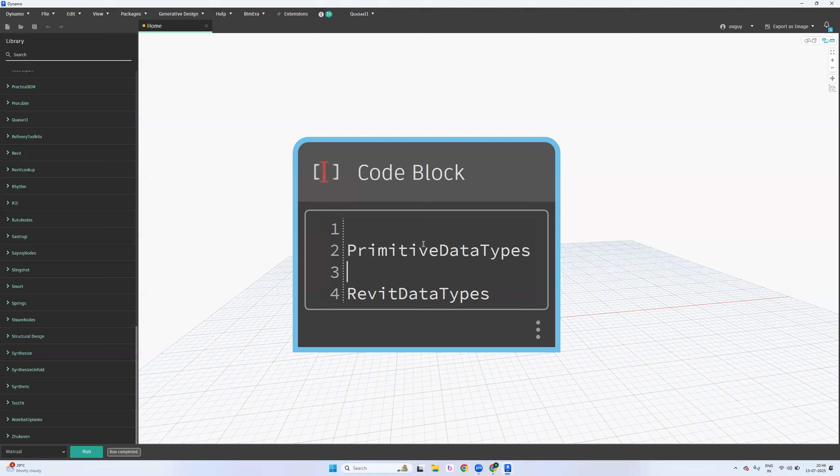So what did we learn yesterday? Come on, let's get into parameter types. Data types - how many types of data types do we have? Two types: primitive data types, and then application data types, Revit application data types. Very good. So can you list out what are the primitive types?

Integer, double, string, boolean, number, and integer controlled parameter. The parameters which we cannot change are built-in parameters. Null. Revit.elements.level - that we're going to see today. A string - we're going to learn that today too. We have a string here, we have a double here.

Give me an example for integer: 1, 2, 3 - whole numbers. Double: 1, 2, 3.4, decimal points, 3.456. String: it's a text. Boolean: true or false, yes or no, check or uncheck.

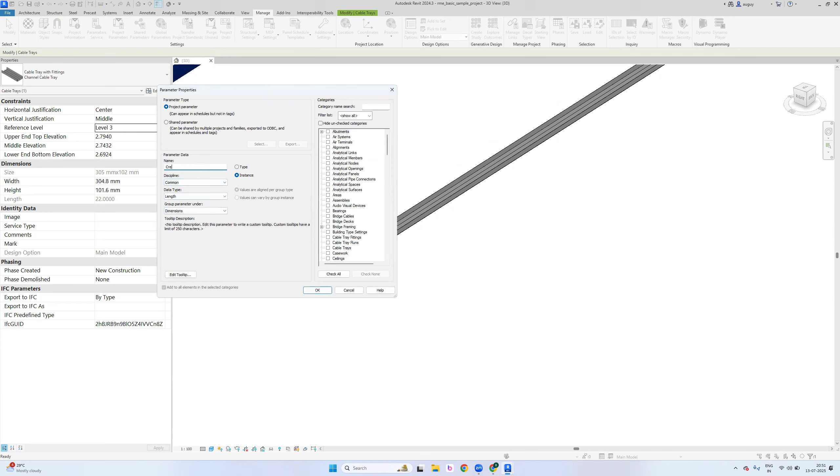If you create any parameter, it will show as a project parameter under identity data. Let's create one and I'll show you project parameters. CreatedByBIMEra, so it could be anything like a text or something under identity data, check all, and it's an instance project parameter.

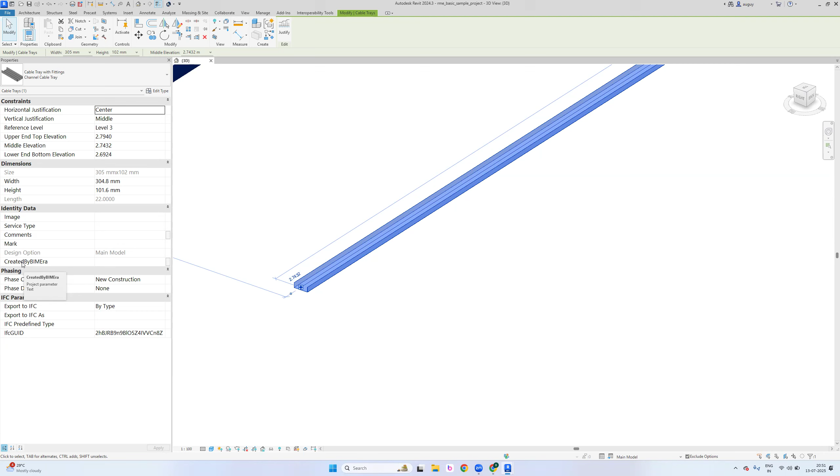Now if I click any element, I can see it's 'CreatedByBIMEra'. What is it showing there? Project parameter name, which is actually in bold color - CreatedByBIMEra, and it is a project parameter. What is the data type of it? It's a text parameter, simple. Clear now? Text. Do you need Dynamo to check the data type of it? No, no need.

So horizontal justification - now, built-in parameter, and it is saying it's a drop-down list. Now sharpen your brain here, because we generally have issues with the drop-down nodes only, I mean drop-down parameters. If it's saying it's like a drop-down parameter, you have to open a Y junction in your brain: is it either an integer-controlled parameter, or else it is an element ID, Revit-specific parameter.

Clear now? Either it is integer controlled or else it is Revit specific. So you have two ways now. For string, it's clear - it is clearly showing it is like a text. Let me hover the cursor on the mark. What is it saying? Mark, built-in parameter, and it is a text data type.

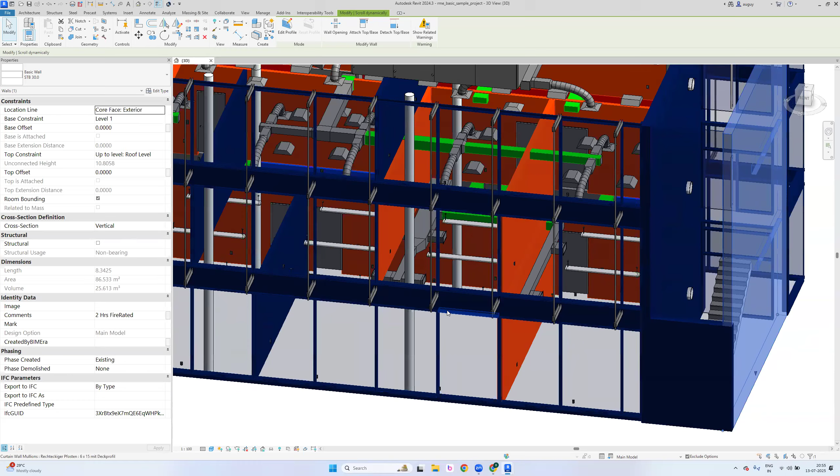Why is the size a text? That's the question, actually. This is taking these two values and adding some units to it, simple. There are some sort of parameters that are just for representation purpose - they just show you something, so you can't use it in the projects. For example, if you want this parameter in any schedules, you will get it only for scheduling purpose. For example, if I pick any electrical...

I'll show you something. If I pick any element, see, none of the parameters can I play with. When I hover the cursor, it can be a text or something else, but these are actually calculating internally. Is it clear? So you can't change anything.

If you assign some load to this, these values keep on changing, right? So if I check any other panel, see, total connected load. If I disconnect some lights or circuits, it will calculate internally and the values will update automatically. You can't edit those. Is it clear? These are called read-only parameters.

What kind of data type is this host? Tell me. Is it integer, double, or string? It is a string. Why? Because it's text - it has double quotations in it, special characters, right?

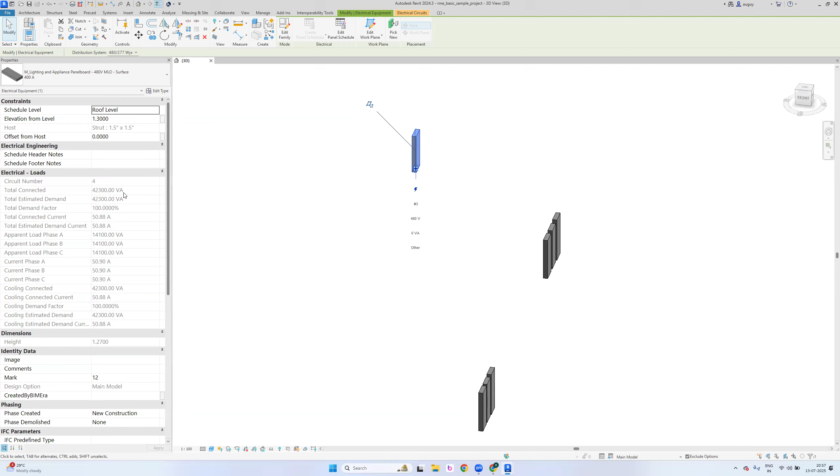And what about 42300.00? This is a double, I think. But why? There is a VA also, right - there is text in it too. It is a text parameter... no, actually double units are not there, I think it is actually units. They are units, they are actually units.

So units cannot be considered as a special character - special character, ASCII character, or a string. Is it clear? Simply, volt amperes is a unit. So units will not be considered.

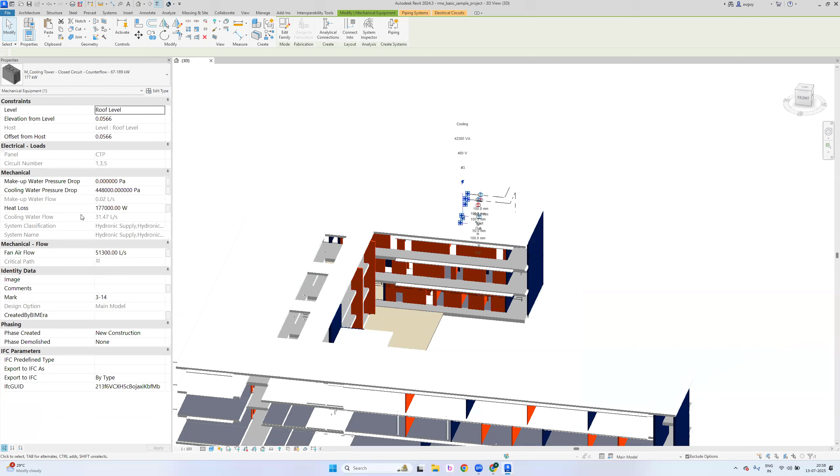Like for example, let's go with all. So what is this cooling water flow? 31.47 liters per second, correct? So liters per second is a unit again. When you hover the cursor on this, it is saying it's a flow. Flow generally is a double number. Is it clear?

What about PA? PA is a unit - it passes because you can't delete that. 1, 2, 3, 4 - if I change this, the PA will be added automatically. But in the size, we mentioned mm, 305mm into - where is that? Previously you mentioned the size, but that was auto-generated. See, that is what I'm saying - a few of the parameters, most of the parameters will try to confuse you.

So we have to apply some common sense over there. If any units are coming automatically, which will be null or negligible, it will be considered as a double. And if you are adding anything manually, it will be considered as a string. Clear? Okay, good.

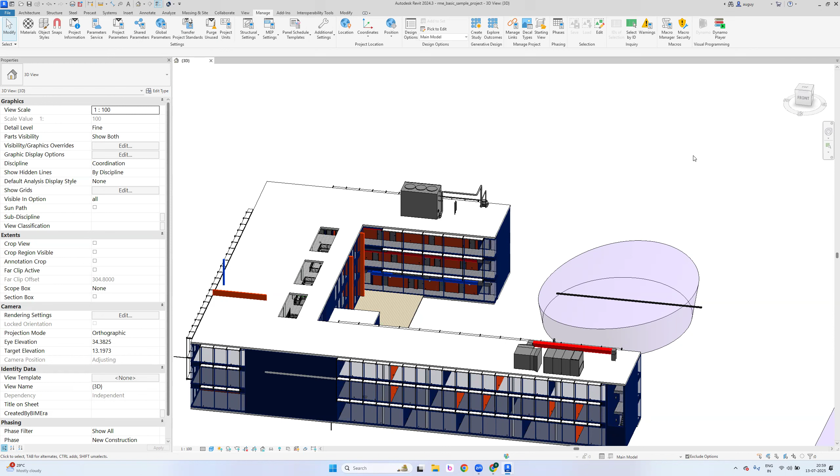So, how about phase created? This is a dropdown now. Again, is that integer controlled? Hover the cursor on this - what is it saying? Dropdown list. So whenever it says dropdown list, you have to think in two ways - either it is an integer controlled parameter, or else it is Revit specific.

So today we are going to play with that Revit specific - how exactly you have to pick that particular element. I'll show you today. So what is the data type of this crop view parameter? It's boolean - yes or no.

Region visible - boolean. Annotation crop - boolean. Clip active, section box, sun path - all of them are boolean.

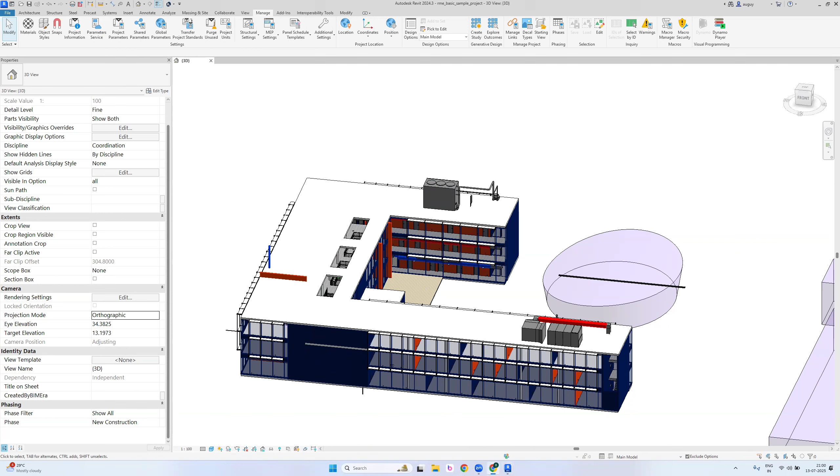What about this visible in option? Dropdown - built-in parameter, dropdown list. Okay. Projection mode? Yes, it's also dropdown list. So if it is showing like a dropdown list, guys, you have an assessment. Today let me show you what kind of an assessment is that.

Sorry, assignment. Okay. So download this PDF, and don't play with any other disciplines apart from yours. Like Rajesh showed me only the cable tray, so I have to pick the cable tray and keep on playing - no, not like that. If you're from a particular background, like electrical or mechanical background, play with those elements only. Is it clear? Play with those elements itself.

So how do you exactly write element category? Take a printout and write element category. Okay, I picked duct here. So what is the variable name? It means parameter name - what it is exactly looks like, how it is exactly looks alike, and what is that actual duct type? It's your answer, and cross check if your answer is right or wrong. Is it clear? So there is another way when it comes to Dynamo.

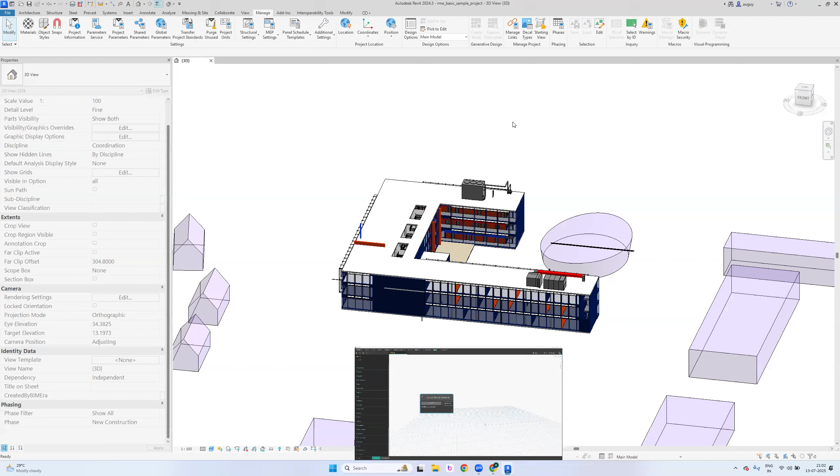I'm going to send this, the data types, and tomorrow I'll send you another one. Today itself I'll send you the second one as well. Okay, clear? Good. So, select model element, select model element, select model element. I just select, and if I pick any element here, let me mute everyone.

I've already picked here: element dot parameters. I'll explain how you get this so much faster.

It's purely technique, bro. I don't have a good memory, seriously. If you ask me frankly, Rajesh, how many nodes do you generally remember? If I go for an interview and the interviewer asks me how many nodes I remember, can I list them out? I can't even say maximum 10 to 15, seriously. But it depends upon that particular scenario.

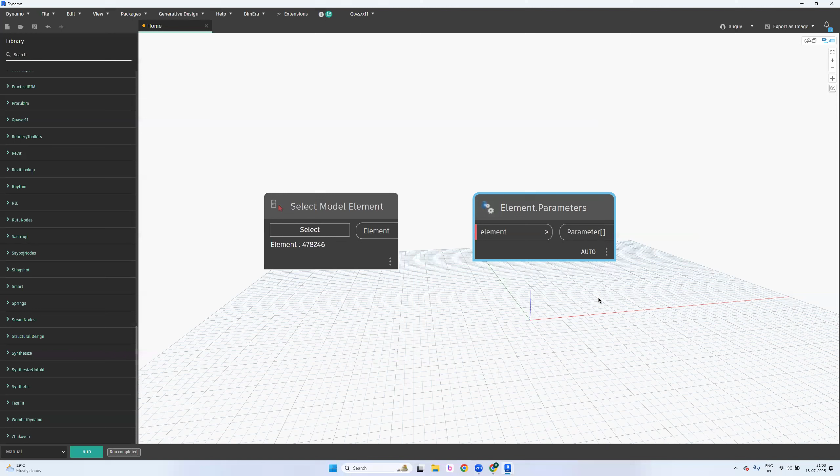There are 6 strategies to play with, and I'm applying those strategies all the time. I don't remember all these node names, seriously. Even to place this fast, we have a technique. I'll explain that strategy in the training after some time.

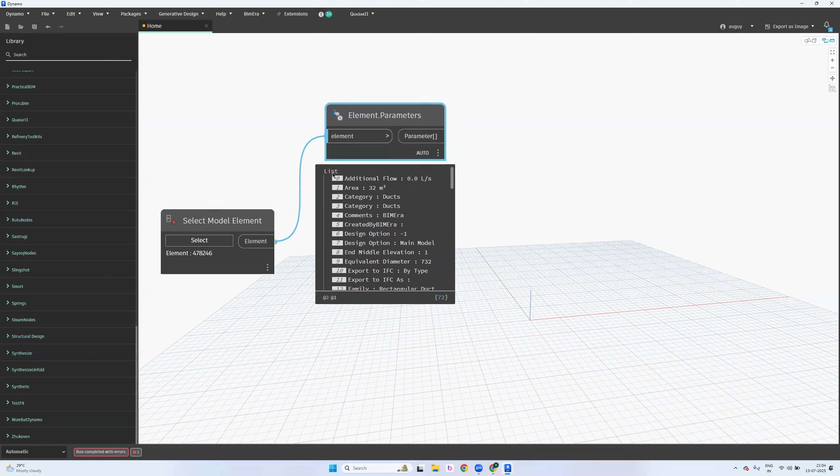So it's automated. It's giving me all the parameters of the particular object. Guys, clear? Guys, are you clear? Yes. Okay, so now these parameters are either edited or read only, it will give all.

We have read only and write only parameters also, both. Some of them can be read only, some can be write only. I'm going to show you that.

So what it is actually asking for: I have an element, can you please get me the parameters? Okay, I can get this. I have a parameter, so you have to frame a sentence. In coding, you have clear functions. Even asking for those functions is interesting, but people feel it's very tough to play with. If you ask me, do you have any solution? Yes, I have a solution for that.

Anyways, I'm going to teach you. Guys, I have designed this course based on 3 different languages. Understand, I have experience, and I didn't do this unintentionally. Some of our experts suggested to me, Rajesh, this kind of example you'll get. If you want to become a tutor, go and learn that particular language so that you can explain any concept which everyone can easily understand. So I have learned almost 3 different languages - Python, C, and C Sharp. There are 3 different languages. And I'm a certified tutor, I mean how to go and teach at their levels, with their standards.

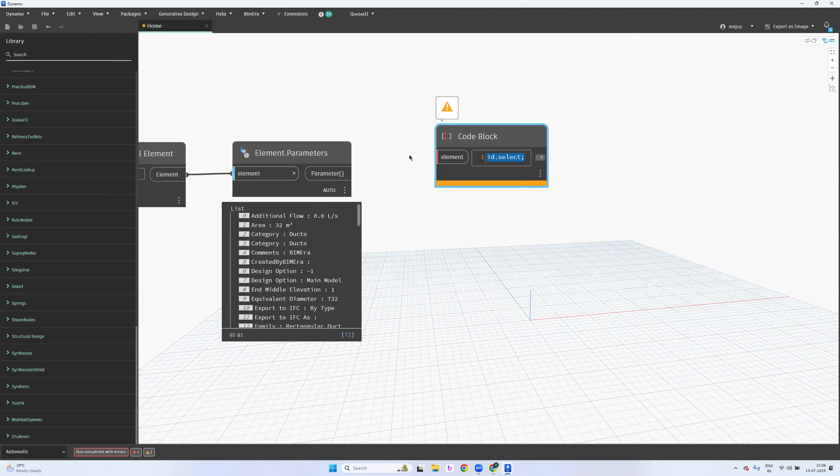Is it clear? I have an ID, I want you to convert into the string. I have an ID, I want you to select that element. Guys, are you clear? Have you seen the difference between before the dot and after the dot? Did you see the difference? Yes, a yes.

We are going to do a deep research in our training later. This is called the parent and child concept, which is a 30% part of the dot notation concept. I'll show you what the dot notation is in some time.

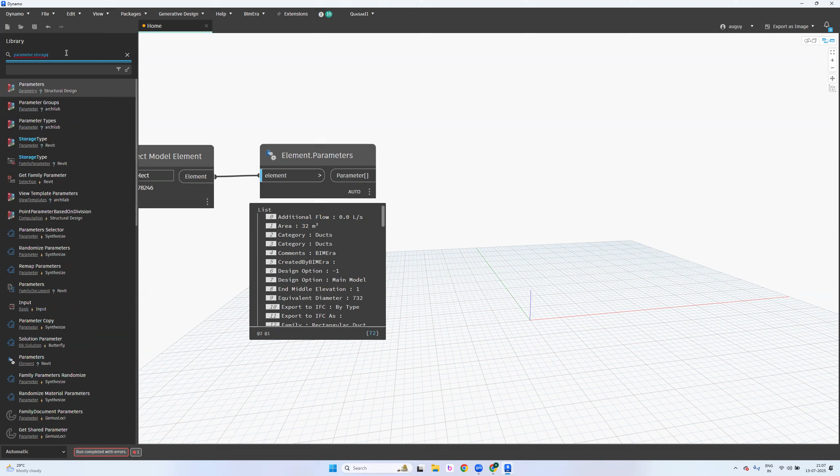Otherwise, I can show you now also. Hold on, so I have a parameter, can I know the storage type of it? Yeah, why not. Parameter - don't use, I'm actually right clicking on the canvas. This is called canvas actually, our workspace. And this is the library. So parameter dot...

So what I'm having now and what I want to play with, what I want exactly - okay, parameter dot parameter types. What is this parameter dot parameter types?

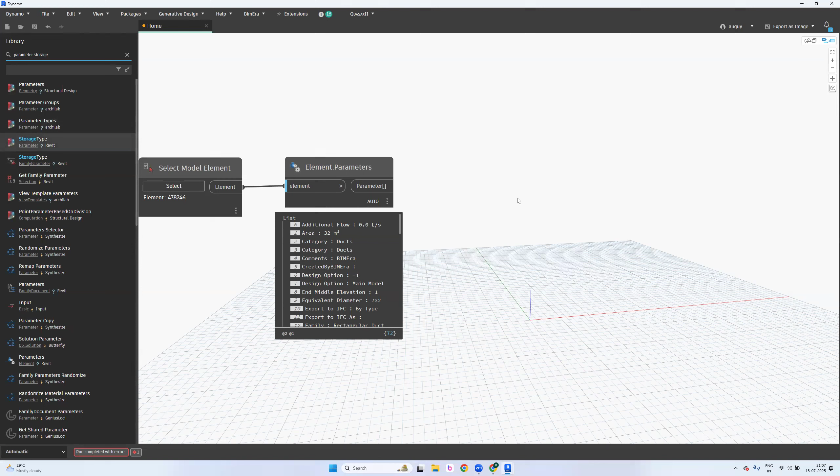Why am I not able to place that? Okay, ignore that, I don't know why it did it. I have a parameter and parameter both matching, so when I connect that, it is directly showing me what type it is.

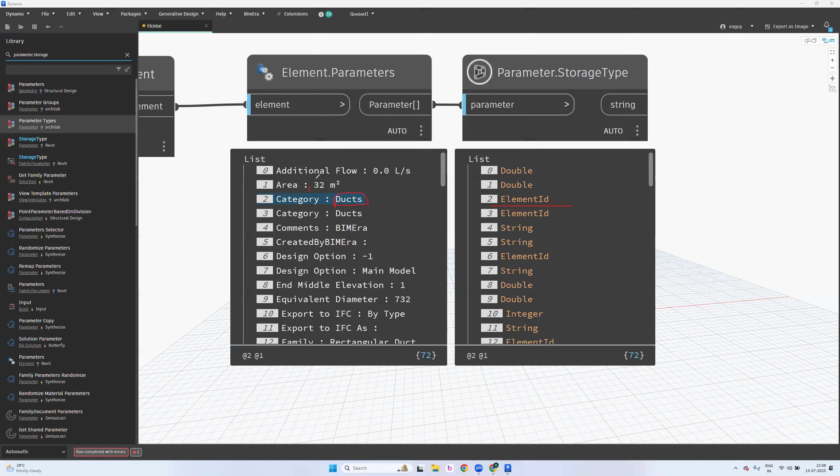Guys, are you clear? Okay, yes. So there will be no confusion if you have a parameter, you don't want to get into Revit again and check what kind of data type it is. Let me give a clear introduction about the data types, the primitive data types, where you have confusion. So category, what it exactly looks like...

Ducts, it looks like a string, but it is an element ID. 32 is not exactly, it looks like an integer, but actually the storage type is double. So 0.0 liter per second, that is double.

Okay, third one is fine. Fourth one is comments, I know comments is a string type parameter created by the one we created today. It's a string, and design option is -1. What does this -1 represent?

We're going to learn this in design scripting, till then don't ask me. It is not an integer, it's something else. Sixth one, here it looks like an integer, but it is actually element ID. That's what I'll explain later - design option, main model, design option.

Here it's showing it's like a string. End middle elevation, double. Equivalent diameter 732, it's double.

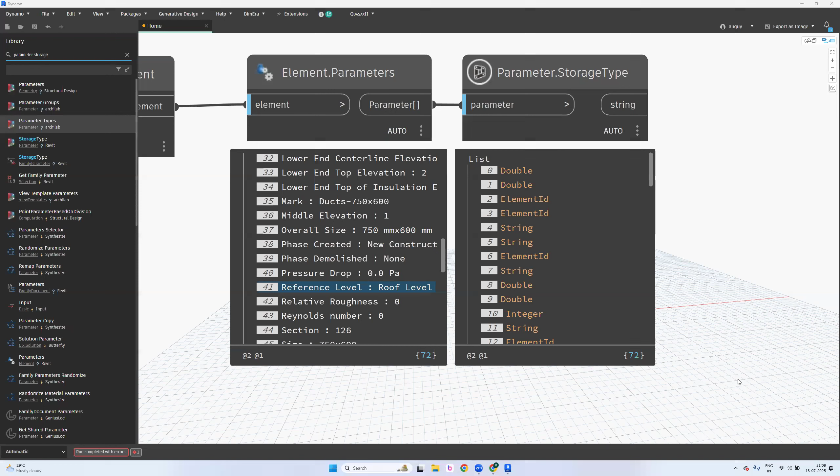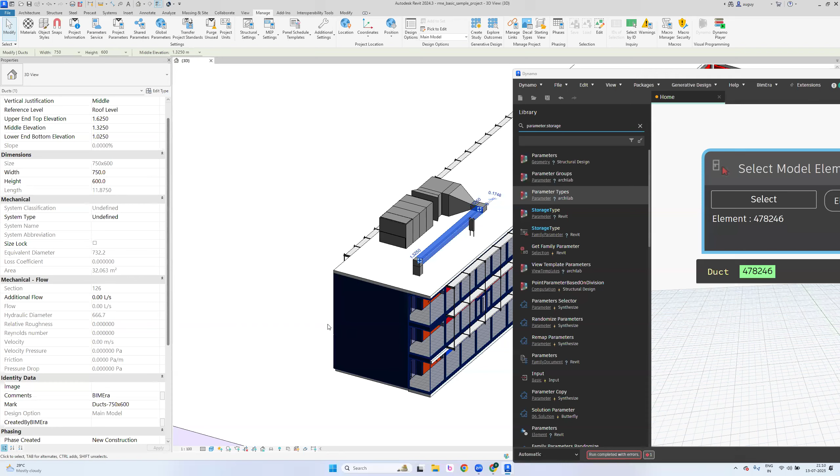Okay, if I scroll down, what is this element? Is this a cable tray? Duct - which duct is this?

Okay, I'll just pick that out. Now horizontal justification - if I zoom in, these are actually in alphabetical order. So HIJK, horizontal justification, it is actually center.

But at 19th index number, it is an integer. What do you mean by that? It is an integer control. It looks like text - am I right? It looks like text, but actually it shows it's an integer. It means it is an...

Integer control, what is that? Integer control, integer control. It's a drop down integer control.

Vertical justification - let me show you vertical justification again, and again that's set to the middle, and 70 number - 70 again is an integer.

What about system type? System type undefined, 59 - it is an element ID. So system type, since it is like a drop down, it is an element ID.

Do you have phase created? PQRS, phase created 38, element ID, phase created. When I hover the cursor, yeah, drop down list - so you cannot control this with an integer.

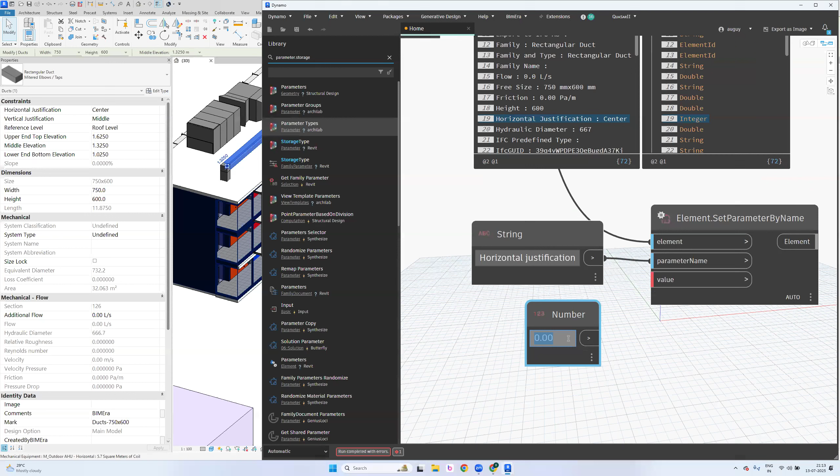Once it is created, we cannot. So you want fancy numbers, huh? You want fancy numbers for the elements? No, no, actually I just want to understand more about this element ID - what is element ID actually? Is that possible?

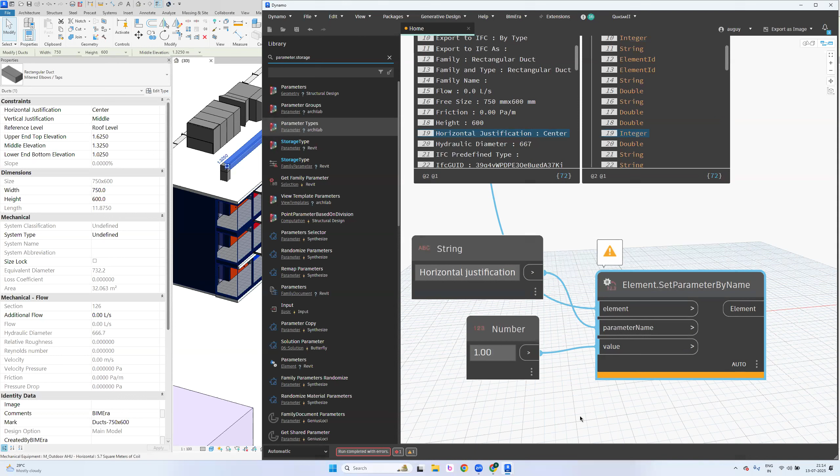Okay, fine. So number, I'll just change this value to 1 and connect this to this. It's giving me a warning actually - what is that? Can you guys give a wild guess?

When I hold the cursor on this, it says no parameter found with that name. Why? Because it's case sensitive. Even if you add a space or forget a space, it will not accept that. See, it works now—it's set to left.

Is it clear? So based on the parameter storage type, you have to decide what node has to be placed and connected to the value. Guys, are you clear now?

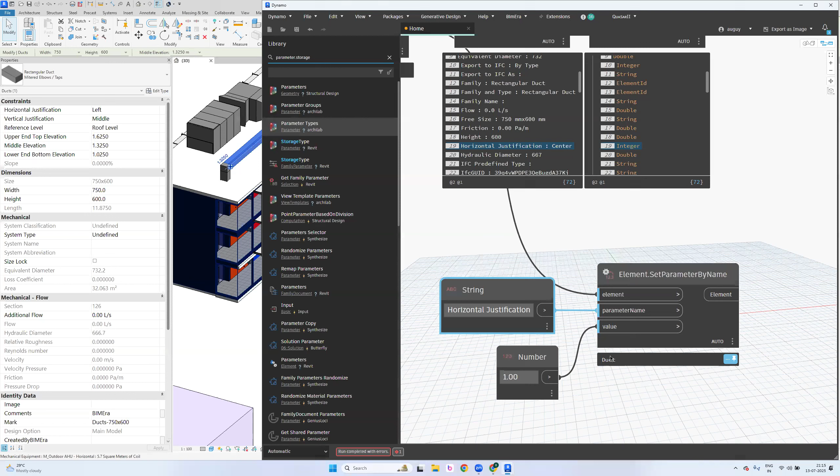Is everyone clear? Shall we get into the Revit data types? This is very, very important. Make sure if you have any questions, clear them today itself. Don't postpone it for the next day sessions. Okay, let the session extend if needed, no problem.

So this assignment which we are going to get, we have to take the help of element parameters and parameter storage type to fill that. You have to do this in the early days, especially if you're very new to Dynamo.

So what is the storage type of a mark parameter? String. Do you need to remember that a second time? No need. Okay, if you keep on playing with these parameters, you don't need to use this parameter dot storage type at any cost. In case you've tried all the ways and it still didn't work, then you will apply this strategy.

Clear? Clear, bro? Clear. Yes, okay, yes, great.

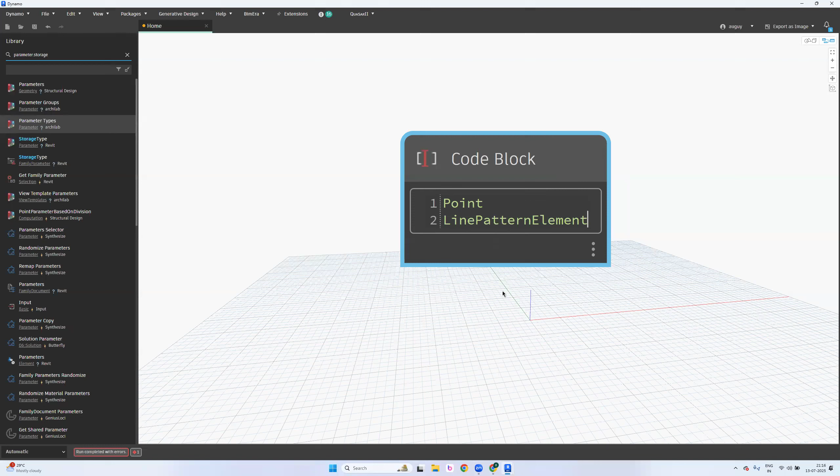So what are the Revit specific data types we have here? First of all, a point can be a Revit specific data type. A line is a Revit specific data type. A surface is a Revit specific data type. A solid is a Revit specific data type. An element is a Revit specific data type.

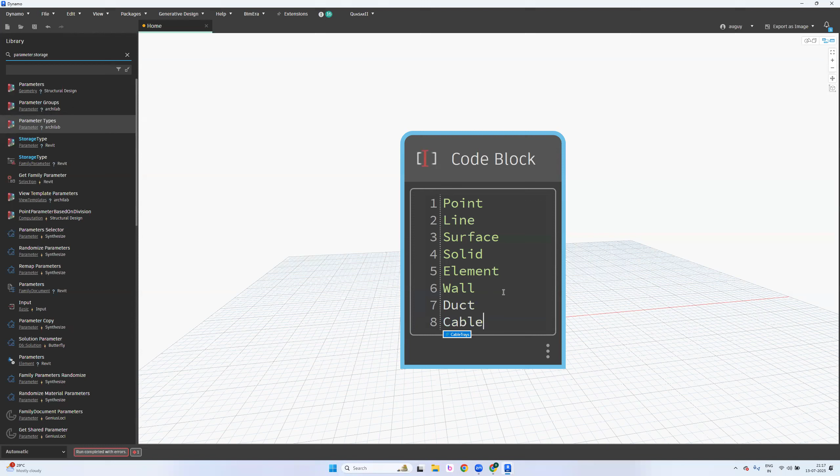For example, wall, duct, cable tray, pipe—let me mute everyone—okay, pipes. So what not? Any object, if it's not a primitive data type, we can consider that as a Revit specific data type. Is it clear?

Yes. We have two types here. First is like element, and second one is geometry. These two are the Revit specific data types. If it is not an element and if it is not a geometry, it will be a primitive data type. Is it clear?

So will point come under element or geometry? Geometry. Very good. Line? Geometry. Surface? Geometry. Solid? Geometry. Mesh? Geometry. Okay, and wall? Element. Duct? Element. Cable tray, pipes, and all—these are elements.

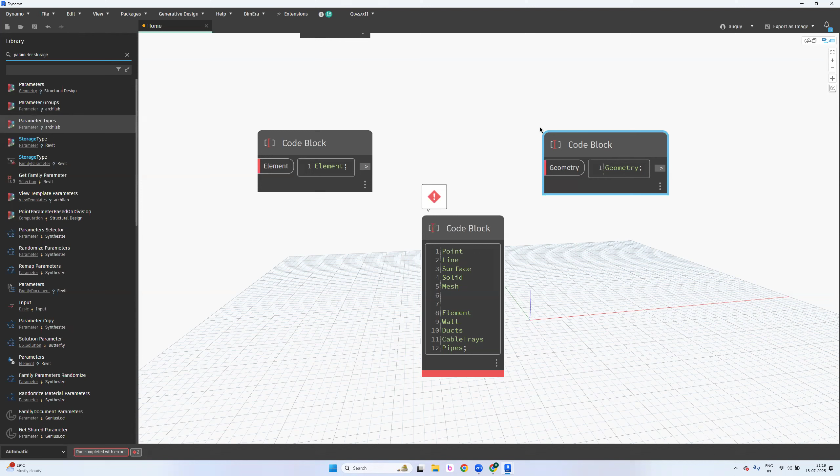Yes, so sometimes what we do—if I want to play with Dynamo, if I have something in the geometry format, I have to convert that into the element. If I have something in the element format, I have to convert that into the geometry format. These are called geometrical conversions: element to geometry conversion, and geometry to element conversion. If I have lines and want to convert them into walls, trays, or ducts, what do we call that? Geometry to element conversion. Is it clear?

For example, what about this geometry to element conversion—that's what I'm doing here. I have a number of lines. I just want to convert these lines into ducts. Lines are geometry, and these lines have to be converted into elements. Okay, now I have elements.

So this is a tray, and this is another cable tray, and another, and another, and another. So I want to place the supports—I want to place a support every 4.5 meters: 4.5, 4.5, 4.5, 4.5, 4.5, 4.5, and 4.5 meters. Guys, are you clear?

So how do we place the points here? We are doing some sort of element to geometry conversion. You are taking the element as a reference and creating geometries, creating geometrical points. Then you are going to use those points—you want to convert that point into an element again. What is that element? Supports. Are you clear, guys?

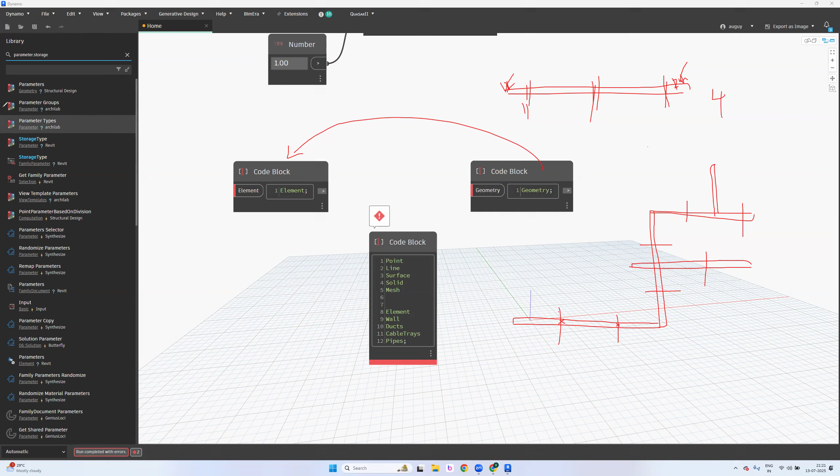So how do you place that? Using some sort of geometrical formulas, you can create such placements. And you have the CAD, you have an element directly, so element to line, and I'm going to show you all these examples. They're not actually scripts, they are examples, I'm going to show you.

Guys, are you clear with element to geometry and geometry to element? Yes, clear. Good.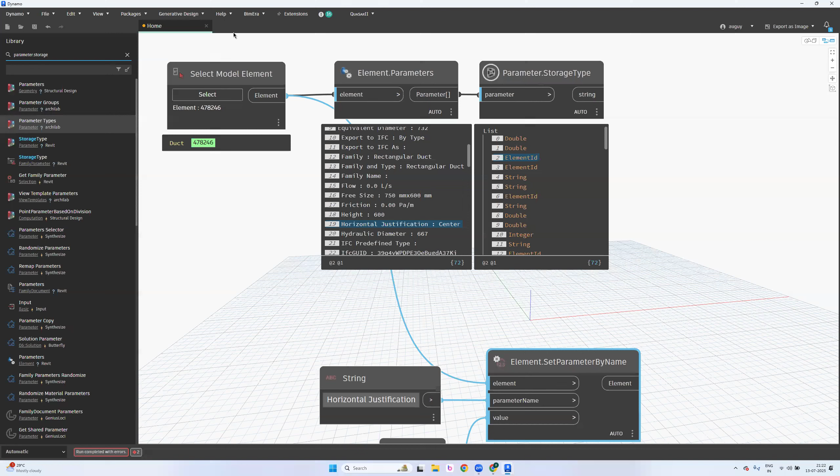Let me, it's a category, okay fine, we can't change this. And the sixth one is design option. So for design option, I have to create a new option set, option one, option two. Option one and option two, okay fine.

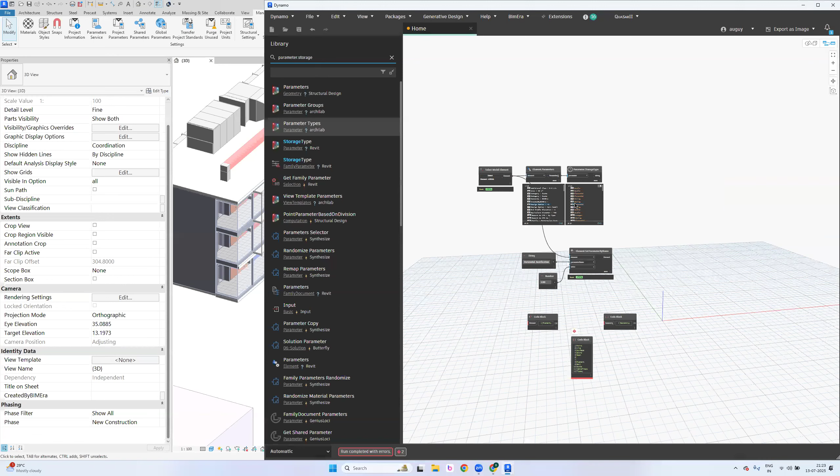Here, that's an element ID. How do I play with this? There are some different ways to play with it. Let me show you some live examples here before we go further.

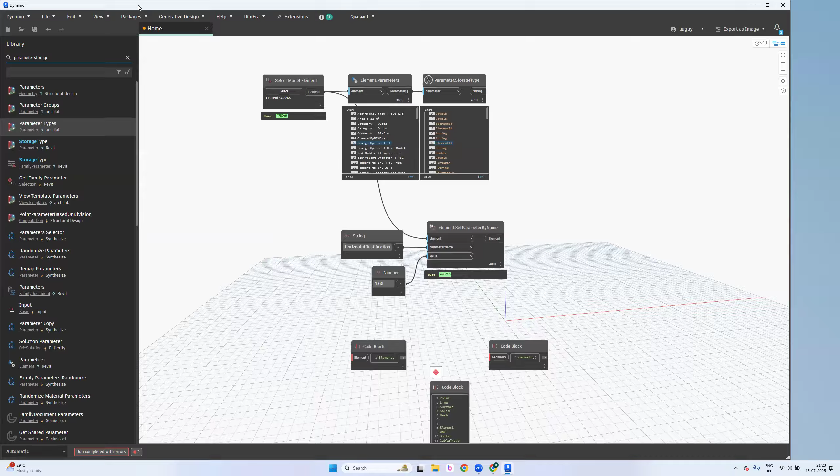Where is that Revit? It's here. I'll just send this. Better, this is much better. But guys, can you able to see the screen if I'm minimizing like this? Can you able to see the screen? Yeah, I can see. Okay, perfect.

So what I do is I just pick an element. I want to change this. I know this is an integer control, is this an integer control? No. Is that an integer control? No, right? Okay, when I hover the cursor on this, what it's actually saying is built-in parameter drop-down list and reference level. So if it's saying it's a reference level, how do you come to know that?

Very simple. Use get parameter value by name and connect this element to this, with parameter name reference level. What was that, string, and type that particular parameter name.

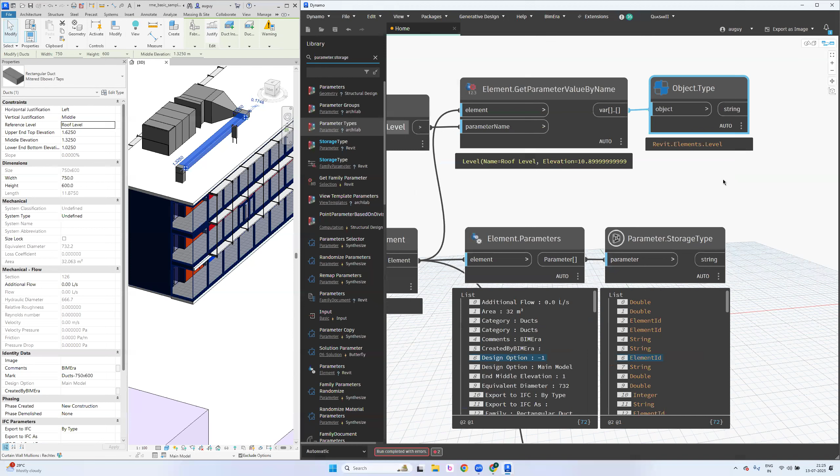That's the reason I'm using object.type. I'll explain once you have a good amount of experience, and if I feel you can digest some complicated concepts, I'll explain how without using object.type you can find out what it is exactly. So this is showing like Revit.Elements.Level. Level, level, level, so immediately find a level nodes.

Level, so you have a levels node. This is what it exactly means, drop-down list in the sense drop-down list. So have a level one directly. Guys, clear? Are you clear?

Now if I want to play with the reference level parameter, my integer won't work. Parameter storage type is not a number, I know that's not, and it is expecting levels. Okay, then that is a true level.

I just want to change this to level 3 and connect this to this. Guys, are you clear? What is the value there? It's level 3 now, it's changed. So when I change this to level 2, it's changing. When I change this to level 1, it's changing. But why is it still there? Elevations are still the same.

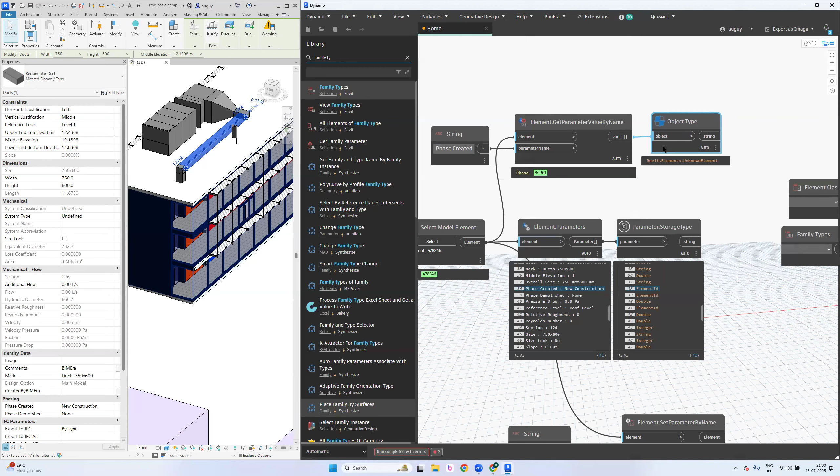38th parameter is phase created. Let me check. Here I have a confusion now, which is saying unknown element. Why, Rajesh, is it not showing it's a phase or something else, and why is it showing unknown element? If it's showing unknown element, you have to apply some common sense again.

So why am I always saying common sense, common sense? Developers use their brain very, very fast. They are very fast in thinking because they keep on playing with it. I mean, if I ask you why I'm not able to see that element in a floor plan, what do you say? Yesterday I placed 100 elements. I'm not able to see those elements now. What do you say? What could be the reason?

View range could be the reason, or it could be hidden - multiple reasons. Second one, or worksets. Visibility graphics settings, VG filters, temporary hide or isolate, temporary hide, work sets, view range, or it's in a plan region.

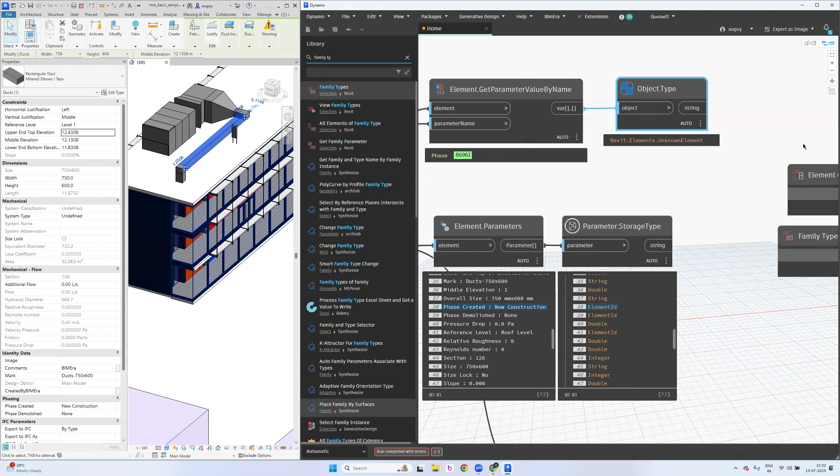Correct? See, for one problem we have multiple solutions. And since we have a good amount of experience in Revit, we can say that it could be something. But here it is not exactly like that. You don't have multiple options, you have to think - think unknown element.

If it's showing unknown element, can I read anywhere else? So phase - this one, phase. Okay, that is phase actually. I'll type phase. I found a select phase option. I found a dropdown node. If I want to play with this particular parameter, which parameter - phase created - the value will be select phase. Are you clear, guys?

So 39, what about 39? That is also element ID, that is also phase only. 41 - level, you mean this, correct? Yes, correct? See, very simple. Since you have seen level, maybe it is expecting a level dropdown.

And the 59th one - system type. System type. How do I play with the system type? Do I have any system type nodes? Do you have any system types?

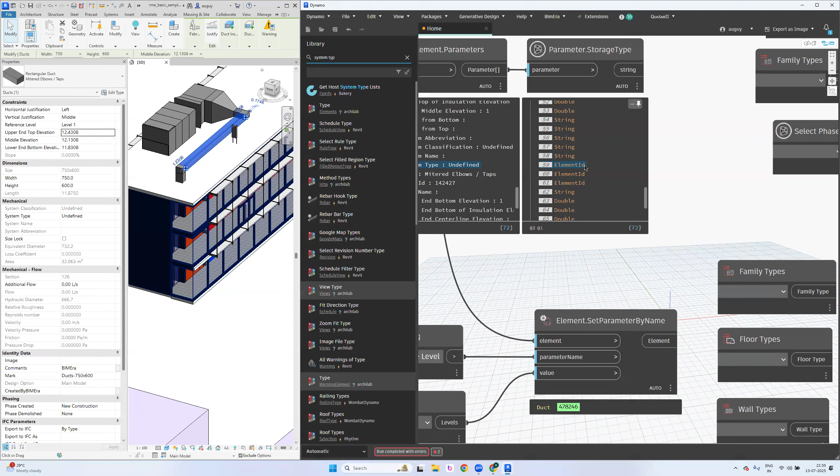String, you cannot pick manually. How? Very simple. If it's showing like a level, here it shows like a level. Then you have to right click, or type 'level', put a dot next to it, and type 'by name'. So, level by name. Are you clear, guys?

Can you give some other example, please? I'll give you an example. Level by name - what if family type? Family by name, so family by name. Family type by name. What is this 'by name'? Category by name. Category dot by name - I'm going to show you what this is.

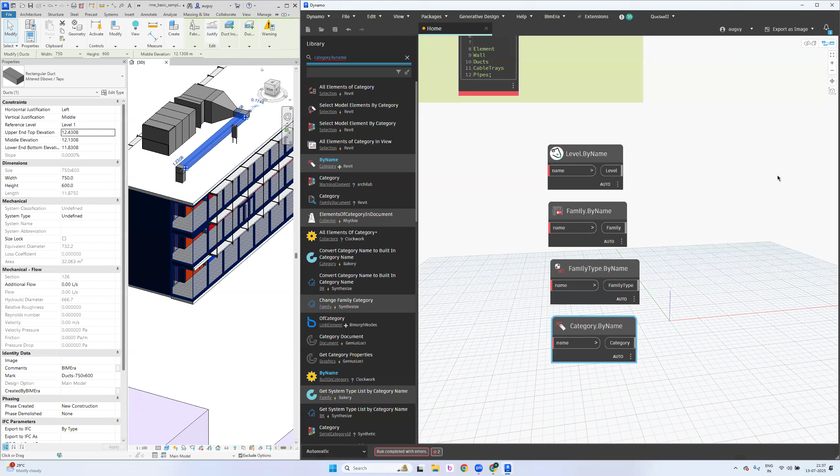There is another strategy again. I'll come to that. There are only three strategies. If the drop down element IDs are not simple, most of you get stuck here. If you want to play with any kind of parameter, you're already good at primitive data types. So getting hands-on with Revit data types is not that simple. In the training we have a lot of techniques, so don't worry, I'll show you everything.

So what else do we have? Family type dot category dot by name. For example, floor type, array type. If I don't have a floor type drop down, floor type dot by name, and wall type dot by name. See, category by name, element type dot by name, roof types - here it is. So this is the alternative for this.

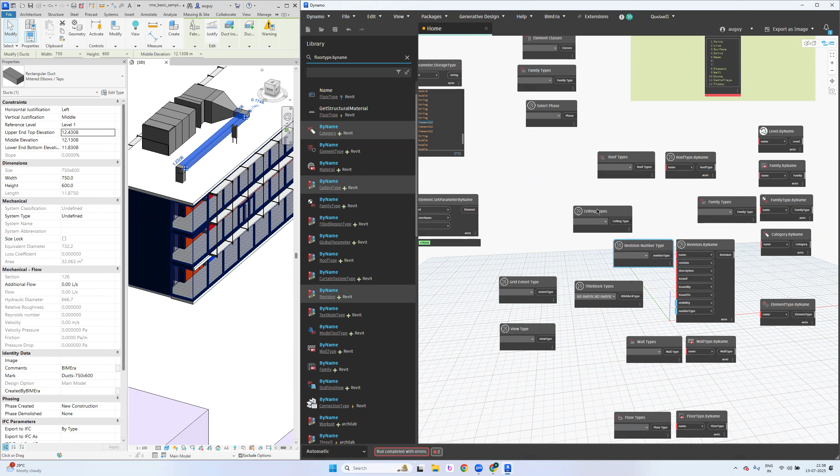This is the alternative for this. Element type, element family type - this is the alternative for this. This is the alternative for this. And wall type dot by name, wall type dot by name - so this is an alternative for this. Revision number - revision by name, this is the alternative of this. Ceiling type dot by name.

Guys, do you understand what this is? How to use it? In case if I don't have - I don't want to confuse you here - for example, I don't have a levels node, the drop down node. Are you clear? So I'll be using this. How do I?

I want you to type a level name in a string format. What is it asking for? String. Guys, clear? So type a string and type the particular level name. It is level 3 - if I want to set it to level 3, see that's converting to level 3. It's converting. What if I don't have a level 4? What if I'm asking for level 4? Will that create? No. It will say, I don't have a level 4, I don't have level 5.

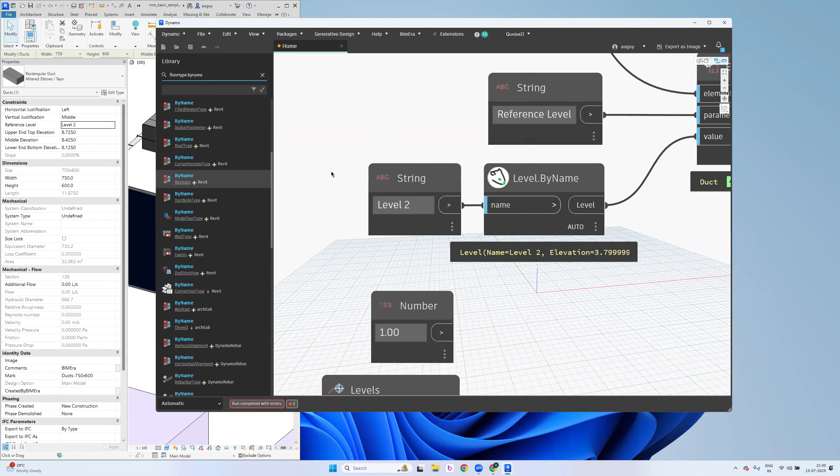So it means it's just giving you from the drop down, level 2. Instead of a drop down, we used to write this manually - this is actually a traditional method. But later on, the developers felt that people using Dynamo weren't able to access this properly. So instead of writing manually, they converted everything into a single drop down. Is it clear? So drop downs are for our convenience, but the traditional strategy is this. What if I connect this level 3 to this? See, it changed to level 3. What if I change to level 2? It changed to level 2. Are you clear now?

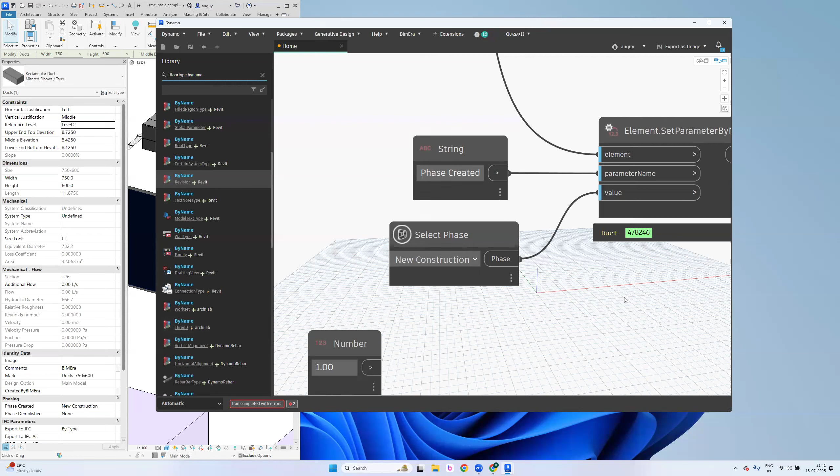What if I want to play with a phase or something - phase created, phase created, and I have a select phase. I just picked the existing one. Since it's already in the new construction, I changed it to existing - see, it's changing. If I change this to new construction, it's changing. Do you see that? What if I don't have the drop down? Phase dot by name - check phase dot by name if you have any such node. Phase by name.

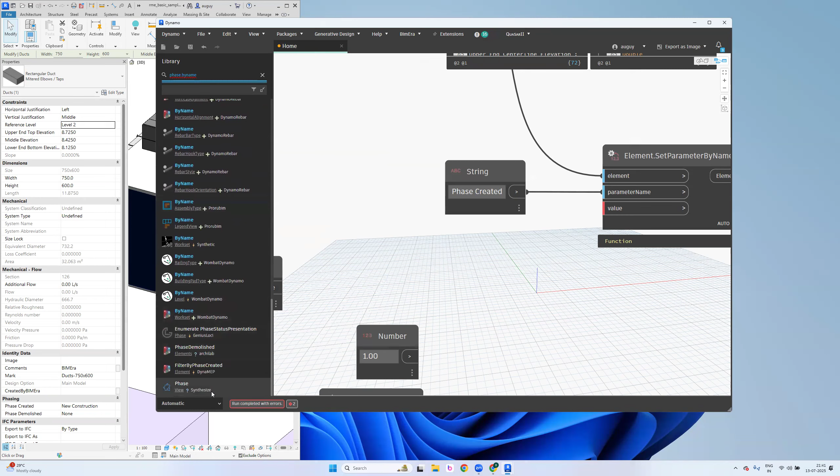Is that phase created by name? No, it's not phase created by name. Get phase filter, phase filter by name. What is this? This is a phase filter. So what if I type existing? No, this is not, this is phase filter actually. Phase. I'll use my extension.

If even the phase by name failed, I have another alternative. What about that get phase by name? Do not get phase by name. Get phase by name. Okay, so I have one more. What if I use a string?

New construction. New construction. So when I connect this to this, it's executing.

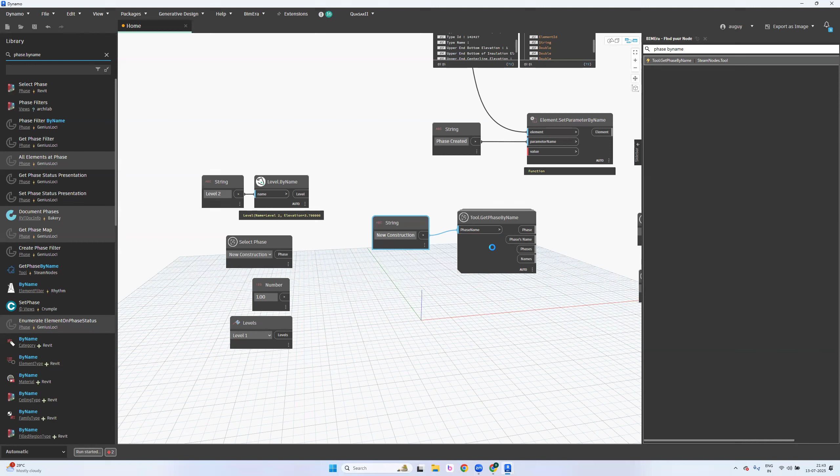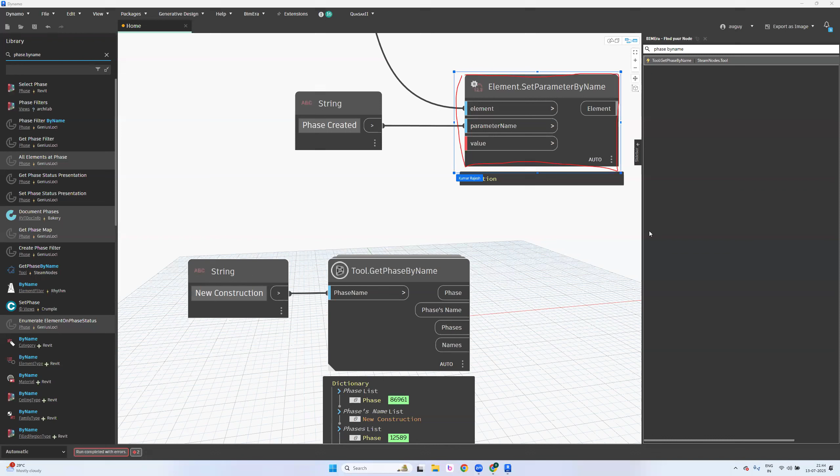And if you notice that when I'm playing with this custom node, the runtime which is loading is taking more time. Did you notice that? That's working, but it's taking a lot of time compared to this kind of node. Did you feel any difference between this and this? Visually, this has only one layer, yes, correct? This has only one layer, but here it has one, two, multiple layers, three layers on it.

Okay, so do you know what do we call this? Both are nodes, but what kind of custom nodes are they? Custom node, custom nodes, this is custom node. What about this? Default system? Not default, zero touch nodes. Okay, remember this is zero touch nodes.

Comparatively, when it comes to the runtime, custom nodes are 5 to 10x slower than zero touch nodes. Guys, are you clear? Yes. So zero touch nodes are much faster.

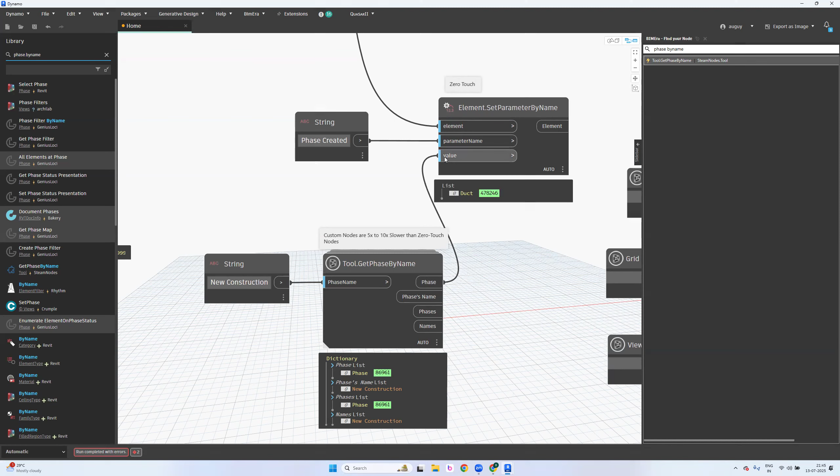Now, anyways, for me, if I couldn't find any zero touch node for phase by name, what I do exactly is I'm using the custom node stuff. I don't have an alternative now. Rajesh told me that slows down the mission, but if you don't have another solution, you have to go with what you have. Is it clear? Now, so I have to connect this phase to this.

Simple, it worked. It's set to the new construction. What if I change this to the existing?

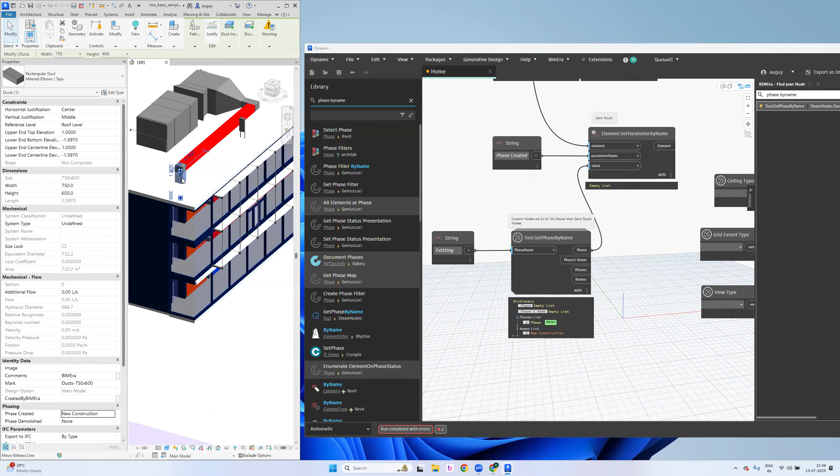Empty list. Refresh. Why it is showing empty list? Oh, there is no existing actually for this object. What about this? Okay, that phase got deleted, I believe. Okay, so that's the reason.

Now, if I connect this to this, it's working. Do you see that, guys? Yes. Okay, so this is very simple. And this is another option. If you don't have a drop down, then you have to follow this.

If you don't have the drop down, what if Rajesh, I don't have a drop down? I don't have a by-name node as well. If you find out, Control F, if you type byname, there are n number of nodes with the byname. Do you see this? These all are like sort of create nodes. I'll explain what those are.

I mean, what kind of nodes we have. We have create, action, query, and you can see on top of it, it's showing like a zap icon, plus icon, question mark. What are all these? So while you place any node on the canvas, make sure you know what type of node you're exactly playing with. Otherwise, instead of moving something, it will create another stuff. Instead of planning to create something duplicate, it will move the original one. Is it clear, guys?

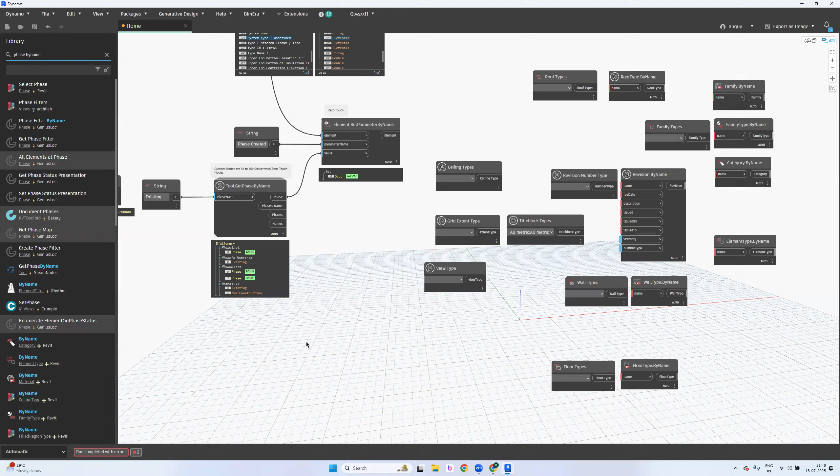What if I don't have this? I have to pay some 10,000 or something. Bro, just kidding, huh? Just kidding. I'll share it with you when it is required. Okay, don't get panicked. I'll share it with you. It's free of cost, only for our students, not for everyone.

I mean, there were some things I read or gone through. Sorry to interrupt, explain those. No worries, clear your doubts, no problem. I'll explain you everything, I don't want to miss even a single concept even though the sessions are over. If I miss some concept, I'll recall and call you again. Let's have this in the weekend. So don't worry about anything. So far no students have told me we didn't cover the topic. I take care of it. I have very bad memory, but when it comes to training, I'll be very attentive. Don't worry.

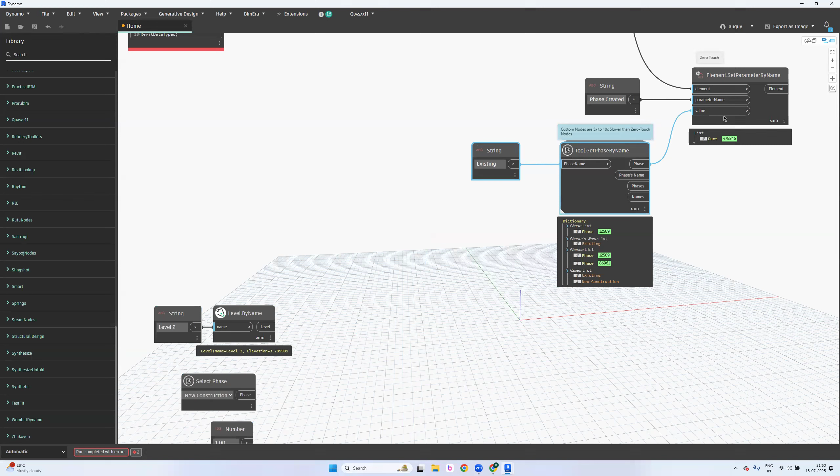Rajesh, I don't have a by-name node, I don't have a wall type node, I don't have a drop down, I don't have a by-name node as well. In that case, remember this is very, very important. Even though you play with these options or not, I don't bother. You can completely forget the traditional part and the drop downs as well.

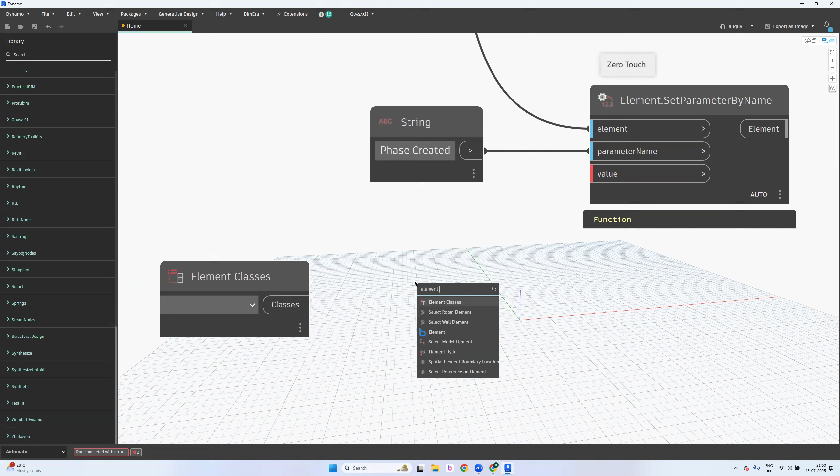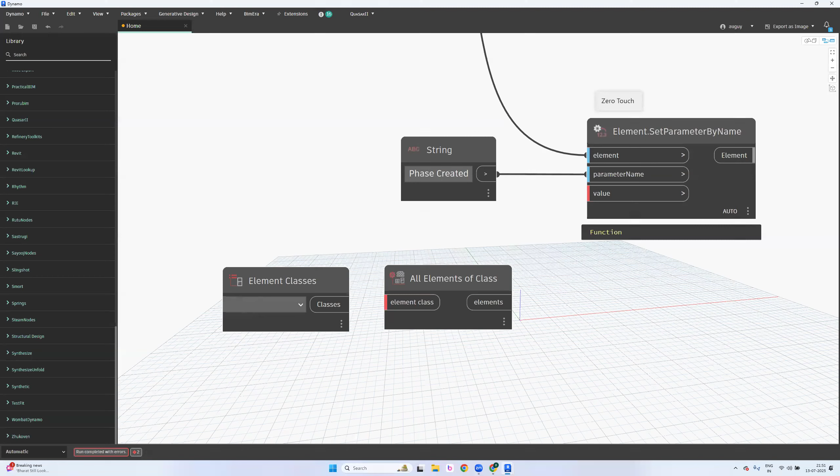But you should not forget the one which I'm going to explain now. That's called, if it is expecting a phase created, okay what is the third strategy? Element classes. Make sure if you are using an updated Dynamo Revit version, I mean Revit Dynamo version 2023 or 2024, you will see that as an element class. But if you are using 2021 or 2022, you will see that as element types.

Guys, are you clear? There is a node called element types, element types in Dynamo. This is the element types. So the same node we have, these guys have changed to element classes. Categories, category by name, family types, family type by name, element types, element type by name.

So there are two processes, and there is a very important process, the one which we are doing now. So make sure, if it is expecting an element ID, no need to think about it. And if you don't want to waste your time browsing here and there, then this is the one and only solution. Level, connect this. So it's going to give you, there are total four levels.

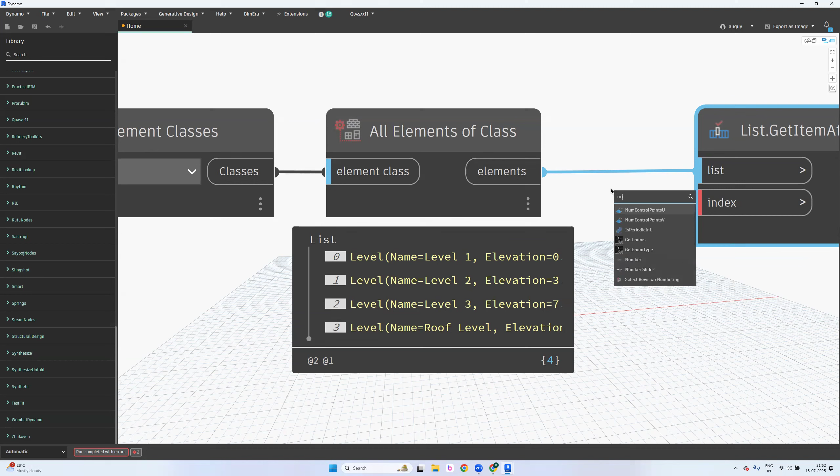So connect this list to this, connect this list to it. And these are called index numbers, 0, 1, 2, and 3. Which one you want? You need number 2. So what do you have to do? Place a number node, and I type 2 in it.

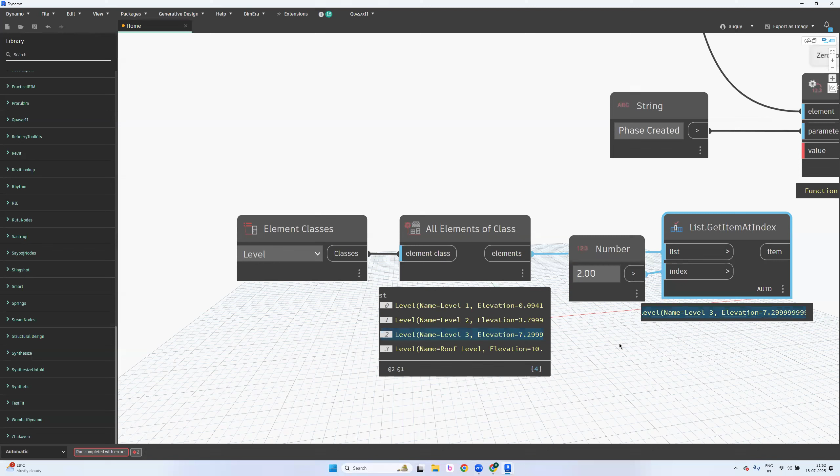Guys, are you clear? Are you clear, everyone? Yes, yes, yes, yes, yes. So I can see the level 2 value here so that you can directly connect to this.

What is that? Reference level. See level 3. Guys, clear? Which is easy, the direct drop down node or this one? Which is easy, the element class? No, you are lying, you are lying. I know that.

Generally, I do prefer the levels node directly, since it's very easy to understand. Correct? But this is a traditional process, always follow this. In case, I mean, the reason you may have 50-50% chances in the by-name process and drop down process, but you don't have 50% here. 100% you will definitely find any kind of element ID.

For example, if you want to play with the phases, you can find that here, phase. If you want to play with the system type, you can find a system type here. Is it clear? For example, if you want to play with the segments, if you want to play with the rooms, and if you want to play with the room tags, everything you will get it here. Guys, are you clear? And we're going to see how efficiently we use this element classes in our future scripts.

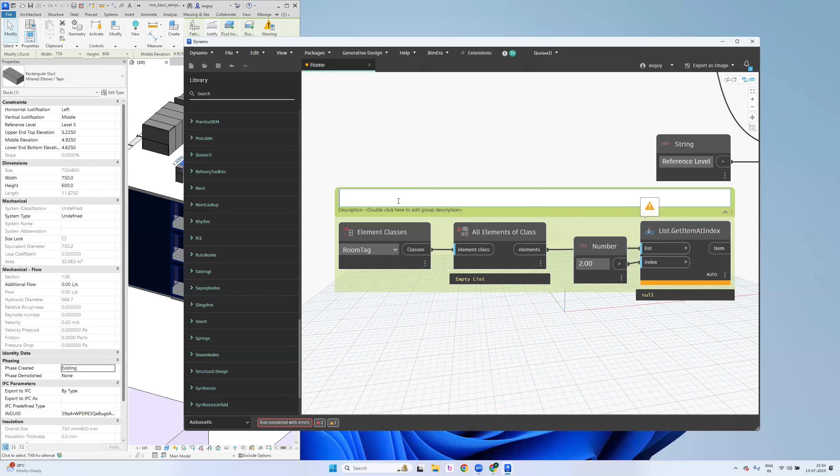Clear? No? Yes. Guys, are you clear? Remember, this element class is available for the lower Revit versions, element classes, is it? Yeah, it is there. I mean, if you're using a lower version, then you have to use element types. Okay, clear? They just changed the name element types to element classes. So that's it. So this is the important process.

Find out element ID, parameter types. Guys, are you clear now?

Rajesh has one doubt: to use Dynamo, is it necessary to match the Revit version? Do we need the exact Revit Dynamo version, or can we use any Dynamo version with any Revit version? What is the coordination between them? Wait for it, one more day, bro. I'll give you the complete clarity on it.

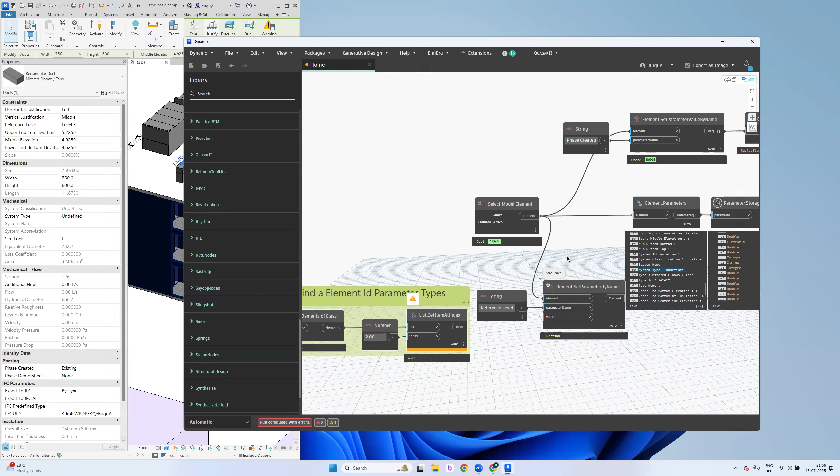Because I can't explain some half content now, other people will get confused. So let's discuss in detail when the topic comes. Anyway, it's a part of our training, so don't worry.

Well, are you clear with this element ID data types? Shall we play with a few more parameters? Just give me any element, tell me with which element we'll play with - wall or any element. Wall, pipe, column, tray, pipe. Okay, pipe. Let me turn off everything except pipes.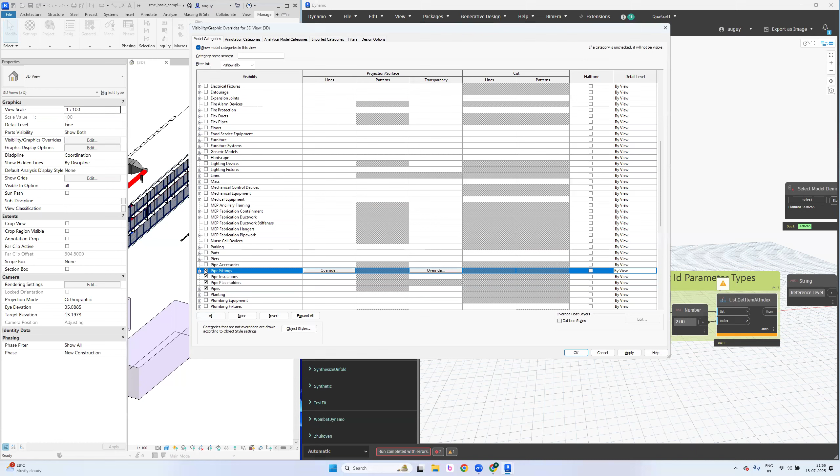I'll just play with one pipe, and which parameter value would I like to change?

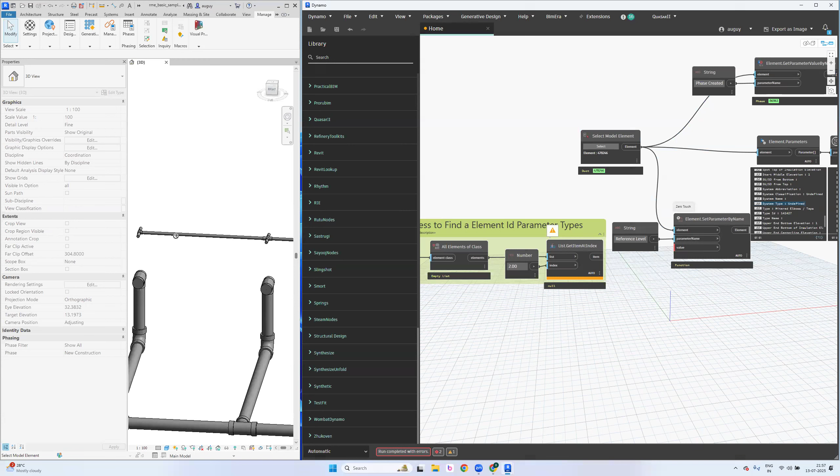Tell me. System classification, system type? System classification - okay, fine, let me show you what it exactly says. I just picked this object and it's a pipe. System classification. Okay, domestic cold water, and it is actually showing it's like a string.

But what is a parameter dot read-only, dot storage - there is a node actually which will explain what kind of parameter that is. So is that a read-only parameter? Parameter dot is read-only, okay fine. When I connect the pipe parameters to this,

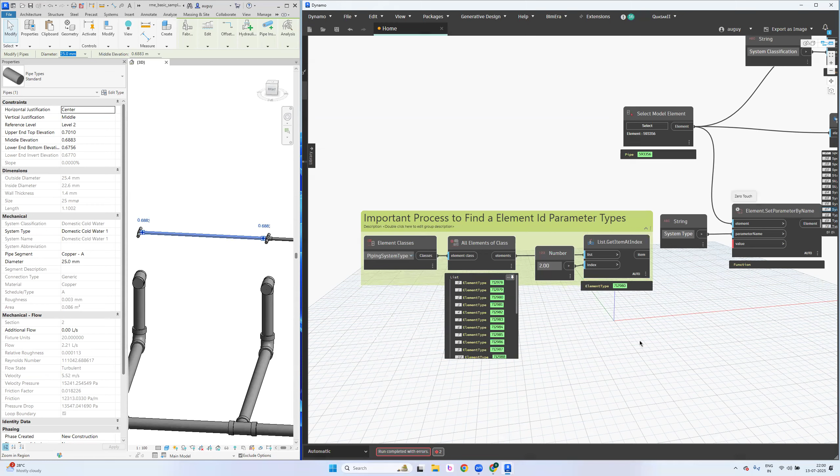Okay, very good. Let me play with the system type then. But how? Let me check in the element classes. Piping, when it comes to the piping system type. Guys, are you clear? Now, which is the correct one? I want to change the system type, but what are all this? Here, everywhere it is actually showing it's like element type, element type, element type. How do I come to know that?

Now you have asked clearly: select the element. So I have an element. Can you please give me the name of it? Name of an element, let me say that - Element dot name.

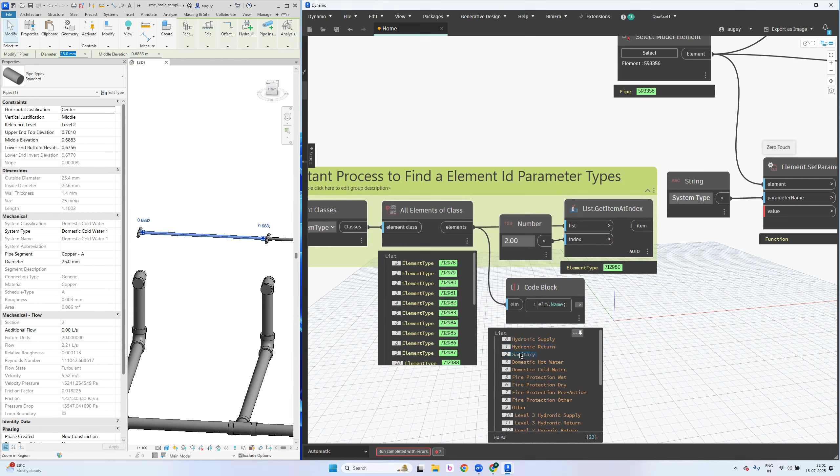No, this is not working. I'll do one thing - Elm dot, don't ask me what is that now, I'll explain you later. This is DesignScript, bro. So this one is hydronic supply, hydronic return, sanitary, domestic hot water. Which one you want me to change? Shall I change this to hydronic supply? Since it's already cold water, I'll change this to domestic hot water.

So the third index number - have to pick the third number, 712981. The reason this is expecting element ID is because it's an element ID parameter, you have to connect the element ID to that particular one. Is that changed now? Yeah, it got changed.

Okay, so this is the way we have to play with it. Forget about all the drop downs, it's a bullshit strategy seriously - okay, but to make us lazy, I mean to finish a few things, they look tempting because it's just one simple thing. But when it comes to the traditional stuff, I do suggest you to go with the traditional stuff always. I do teach you the shortcuts as well and the traditional strategy, but you have to go with the traditional strategies until unless you're clear with the complete concept. Then it's up to you whether you go with the shortcut or traditional strategy. Clear?

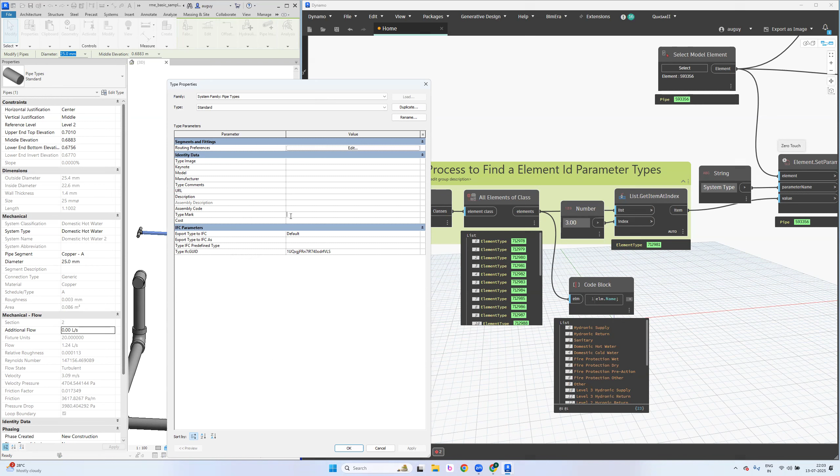Okay, now what else you want me to play with? How do I set additional flow? What type of storage type is this? It's a double, so that you can simply change it. Okay, how about the type parameters, bro? I want to fill the type mark value 1A. How to change it?

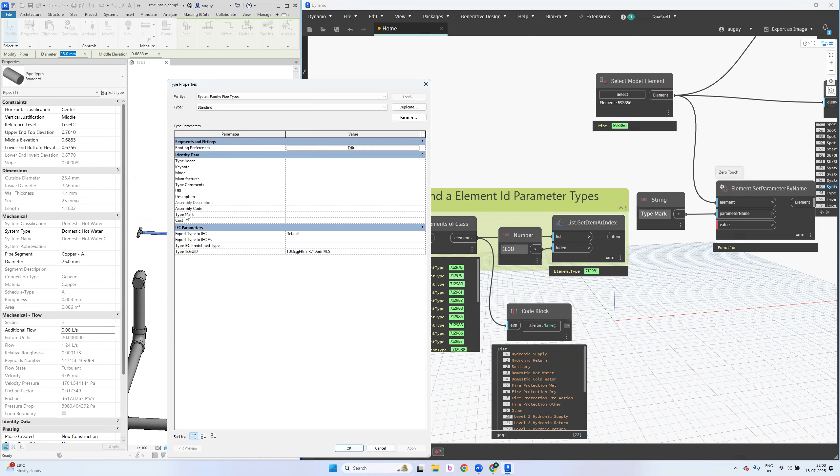Type mark, let me type. Disconnect this. So type mark, and what kind of storage type is this? When I hold the cursor on this, is it showing me anything? It's a text parameter. Ah, it is text parameter, correct? Yes. Okay fine, so I'll use string for now.

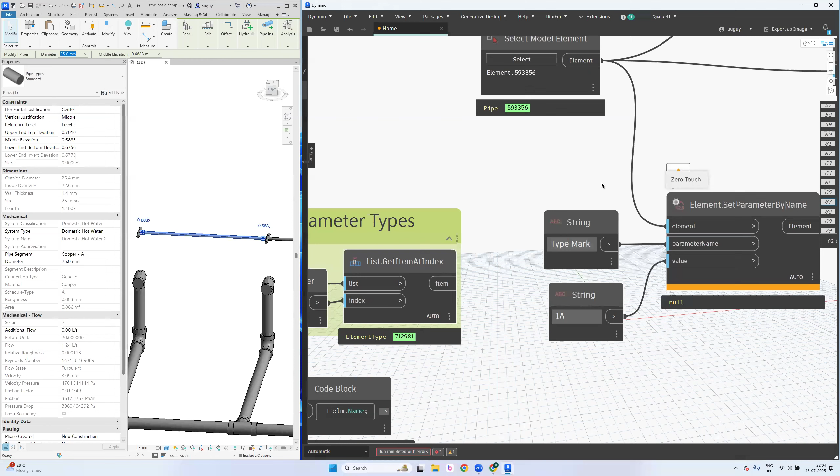I need 1A. Oh, what is that? No parameter found by that name. Why? We have the parameter in this edit type, right? Is there any case sensitive issue? No spaces, no additional spaces, one space between, and capital T, capital M. Why isn't it accepting?

Why is that not accepting? Because of many types of system types. I'll give you system types, and I'll give you clarity now.

How many element IDs would be there for one element? One, only one, correct? Only one, one element, one ID, right? Yes, correct. One element, one ID only. How come two element IDs would be there for one element? Not possible, right?

If you change the element location, maybe the element ID will change, right? Actually, let me show you. There is a process called Revit element hierarchy. So if you go with this hierarchy, for every element, there are four different IDs.

Seriously, that is the reason when you copy an element ID from Navisworks, you may not be able to find that element ID even though it's 6 digits again. The same 6 digit number, when you copy from Navisworks and paste it in Revit, it says I couldn't find that particular element. How come? You have picked the correct element, but still it is giving you the wrong element ID. It means instead of getting this element ID, you got another element ID. Is it clear? Shall I show you how it exactly looks like?

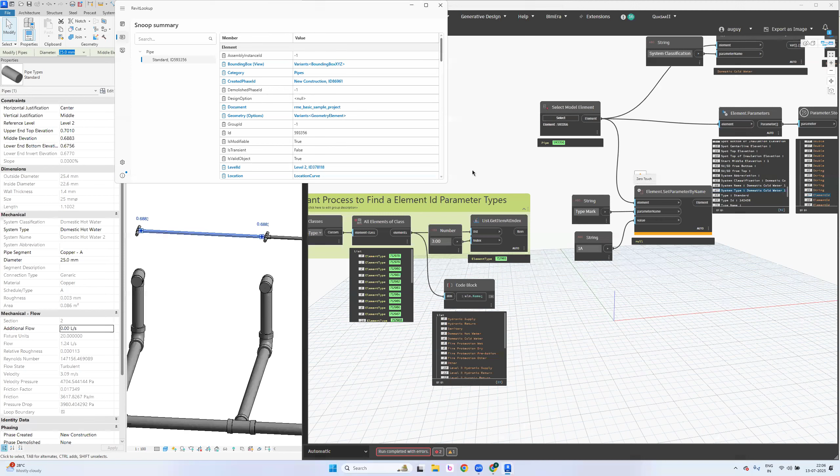I use a tool called Revit Lookup tool and Snoop Selection. This is the properties palette for us—I mean, for our students. So this is the properties palette, and whatever properties we have on the left hand side in the properties palette, they are not even 1% of the actual parameters we have.

We have 99% of parameters waiting. If you have only 20 parameters here, it means there are 2000 parameters waiting for you to play with. Guys, are you clear? So this is the properties palette for us. Okay fine, let me show you.

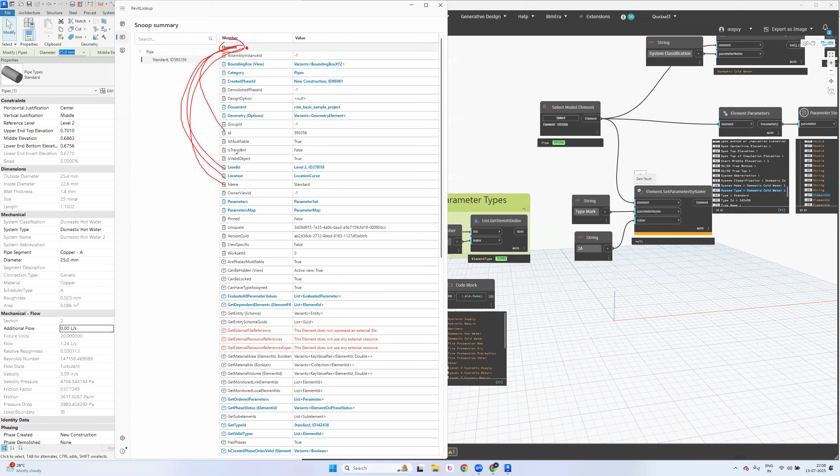So 593356, this is an element. And how do we exactly write element.id, element.location, element.get parameter value by name—all based on this. See, I want to play with an element. Element, if I put a dot next to it: element dot id, element dot name, element dot location, element dot level id. Guys, are you able to frame the sentence?

Do you able to frame the sentence? Yes. The way we write in Dynamo, it's completely based on the structure. Even if you notice this, element dot parameters—see, element dot parameters. So element dot parameters, okay fine.

What if I hit escape? Get into the parameter. I have a parameter here: parameter dot ID, parameter dot name, storage type. Do you see that? Parameter dot storage type. How did you get this? Parameter dot storage type, parameter dot is read only.

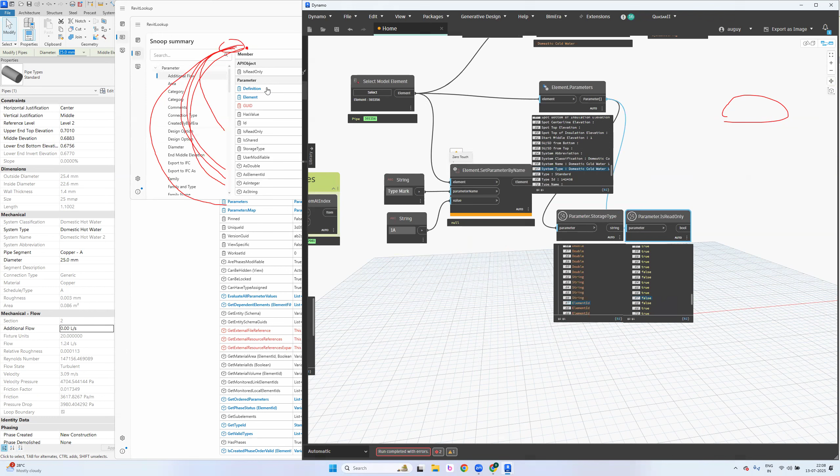Do you remember? We just played with this, yeah, correct? Parameter dot is read only. How am I getting these functions? Based on this lookup tool actually. Okay, so there are a number of tips waiting for you, don't worry. Okay, first let's get into this.

Let me do it again. If you're feeling bored—am I unnecessarily showing you idiotic content? No, no, okay, okay.

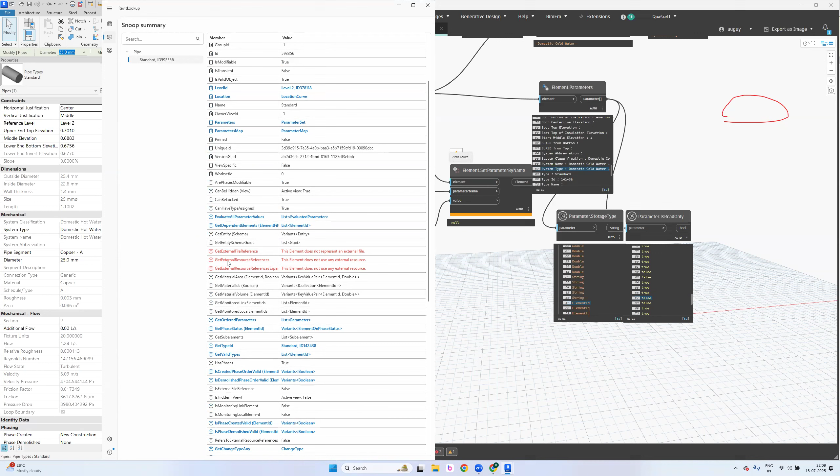So this is an element ID, bro. Element dot ID. Okay, where is this ID coming from generally—a type, correct? An element instance is coming from a particular type. So where is the type? Element dot type, element dot type, element dot type. See, element dot get type ID.

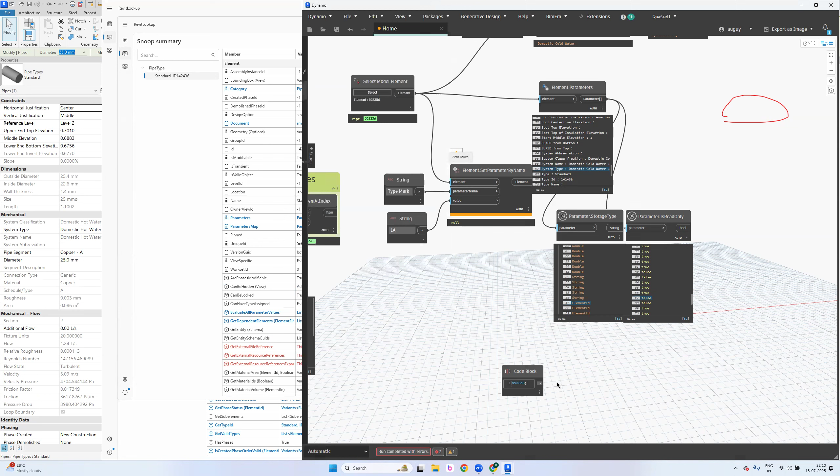So this is another ID. Let me copy this value and paste it here. Okay, get type ID—this is an ID actually. Where is an ID? ID. There is another ID. I just copy it—even this is also a particular ID.

Muted. Don't panic, sometimes it happens.

Okay, so get type ID. Where is this type coming from? A family, am I right? So where is that family? Scroll down, where is that family? That particular family here. So get similar types, element ID, cross. What is this? Oh, it's pipe. Then there's another way to fetch this.

Forget about the family for now. When I click on the category pipe, there will be another ID. Sorry, not this one, this one. There's another ID - in between we missed some family type ID here. There's a reason behind it, I'll explain. Let me show you the difference.

What if I copy this again? What if I copy this and select by ID, paste, and click on show - okay, it's showing me an element, that's fine. But what if I copy this? Even this is also the same element ID, same element ID.